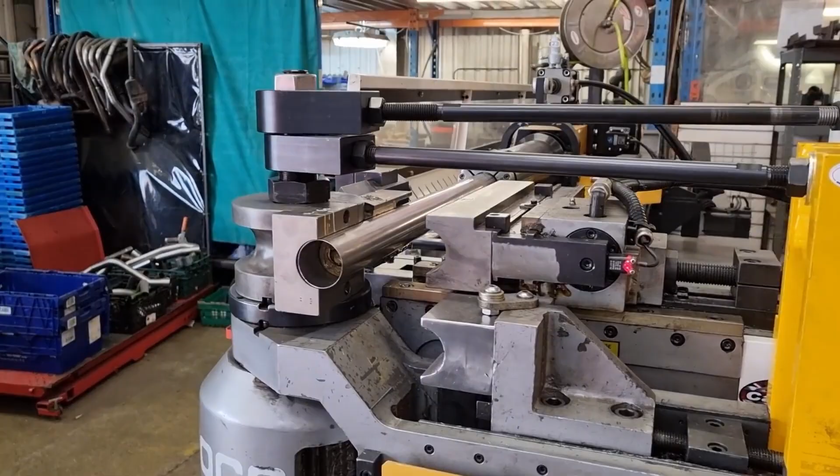There is a machine running in your kitchen right now. It has been running, essentially unchanged in its core design, for nearly 200 years. Not upgraded, not redesigned. The same fundamental principle, operating on the same trapped gas, driven by the same mechanical pump, just with better insulation and a digital thermostat bolted on top.

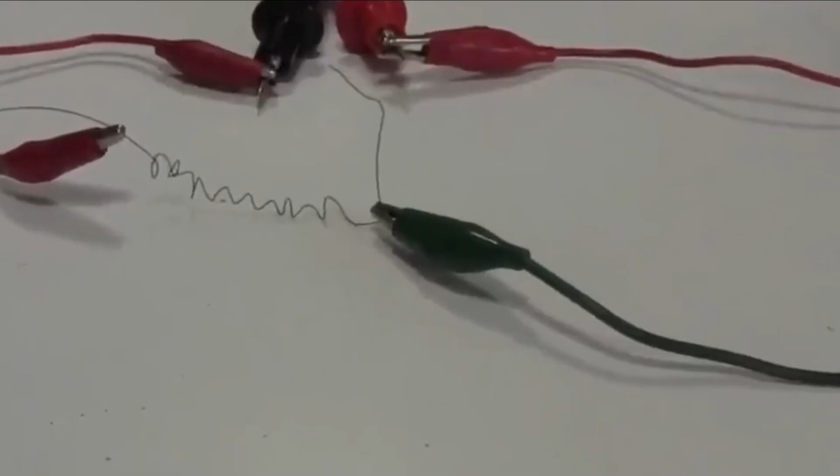The refrigerator is one of the most consequential inventions in human history. Remove it from American infrastructure for a single week, and the food supply chain collapses. Hospital pharmacies lose temperature-sensitive medications. Entire climate zones become functionally uninhabitable during summer. It is everywhere, it is invisible, and almost nobody thinks about how it works or how old the idea actually is.

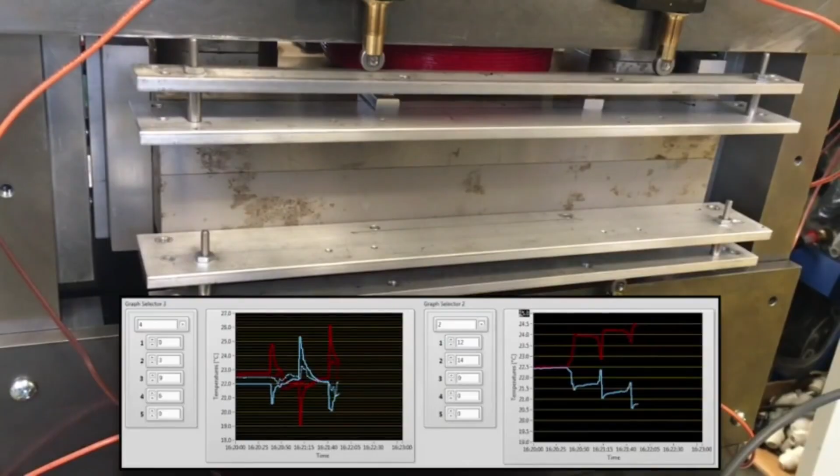Here is what makes this story unusual. The country that invented the refrigerator may also be the country that ends it. Not with a better version of the same machine, but with something so different that it has no moving gas, no chemical refrigerant, and makes almost no sound at all. And the key component is a piece of metal discovered accidentally by a Navy researcher trying to build a better missile nose cone, where the refrigerator actually comes from.

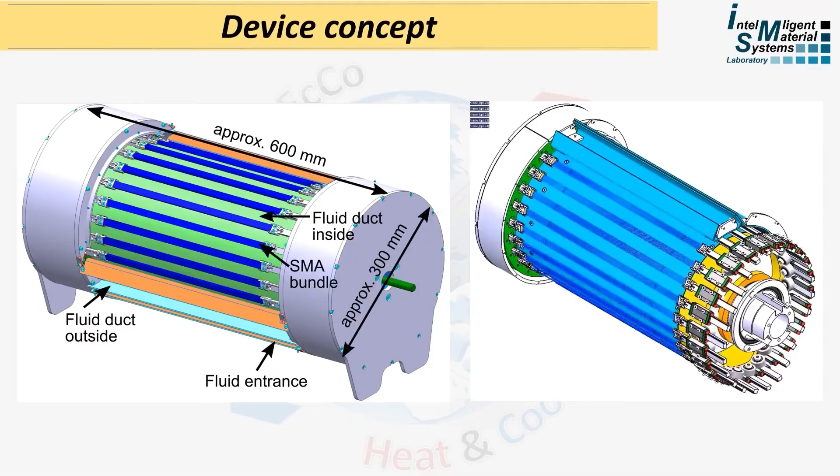Most people, if asked, would guess the refrigerator emerged from European industrial laboratories in the late 19th century. The actual origin is earlier and more American than that, in 1834. A man from Newburyport, Massachusetts, named Jacob Perkins patented the first working vapor compression cooling machine. Perkins demonstrated that a special gas, compressed mechanically and then allowed to expand, could extract heat from an enclosed space reliably, and on demand he could make ice.

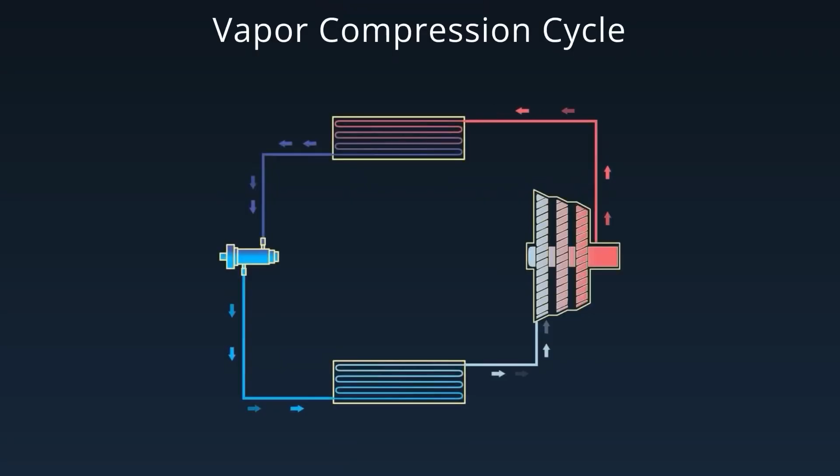He could keep things cold in an era before electricity, before modern chemistry, before industrial manufacturing. He built the core system that still hums behind you in your kitchen today. Nearly 2 centuries of engineering refinement have followed. Better materials, better refrigerants, better insulation, electronic controls, but the operating principle has not changed. Compress a gas, release heat, expand the gas, absorb heat, repeat indefinitely.

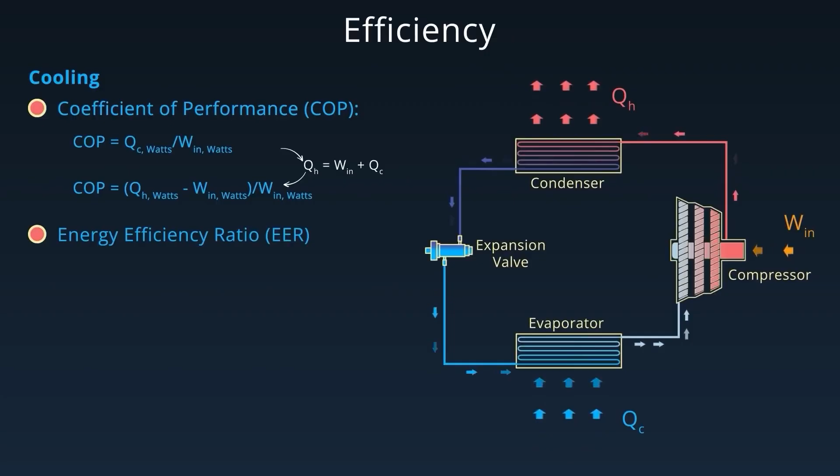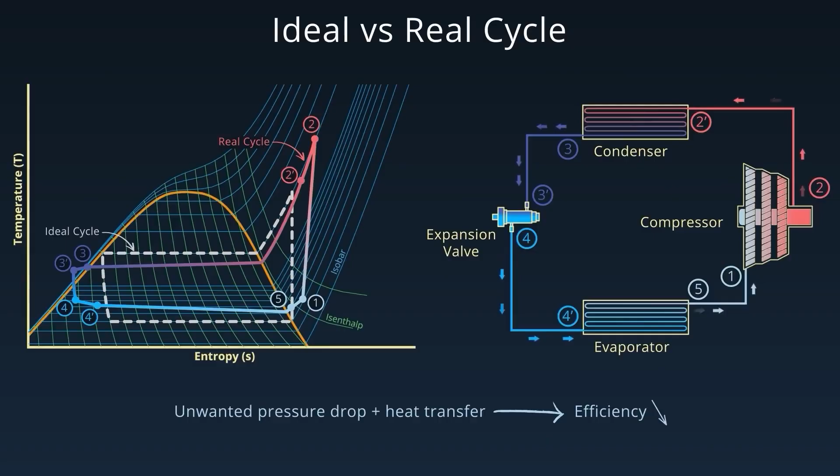That single loop, Perkins's loop, underpins every refrigerator, every air conditioner, every commercial freezer, every pharmaceutical cold storage unit currently operating in the developed world. The question worth asking is why nothing has replaced it. The answer is not that nobody tried. The answer is that every alternative approach encountered a specific engineering wall that nobody could get around for 50 years, until a research team in Maryland tried pushing in a completely different direction.

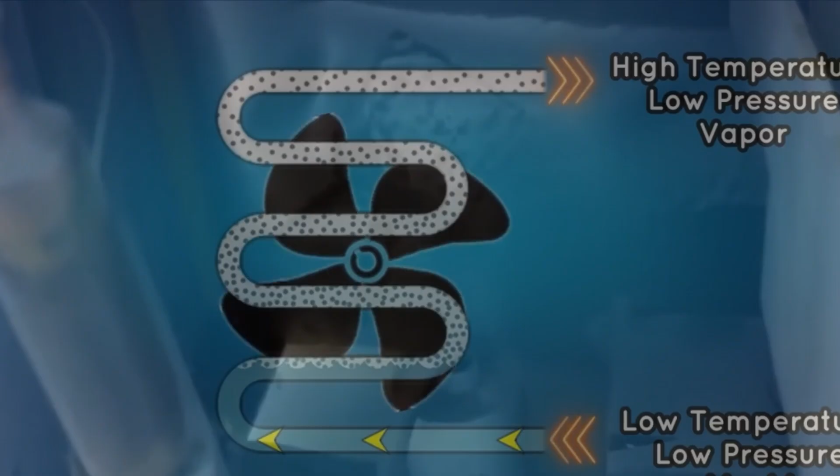The problem with the machine you already have: vapor compression refrigeration has 2 structural problems that have never been resolved, only managed. The first is mechanical. The compressor, the pump at the heart of every refrigerator, contains pistons that cycle continuously, thousands of times per hour, for the entire operational life of the appliance. That is the hum you hear from your kitchen at night.

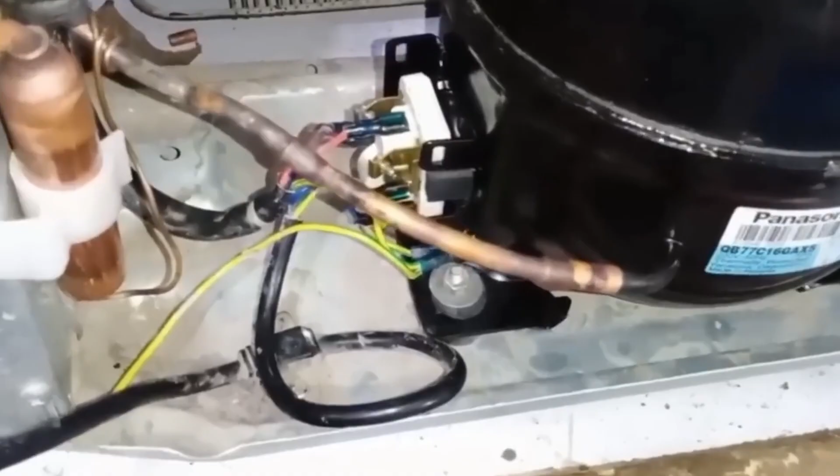That hum is also a countdown. Moving parts wear, bearings degrade, seals eventually fail. The compressor is the reason refrigerators die, and it is the reason they make noise.

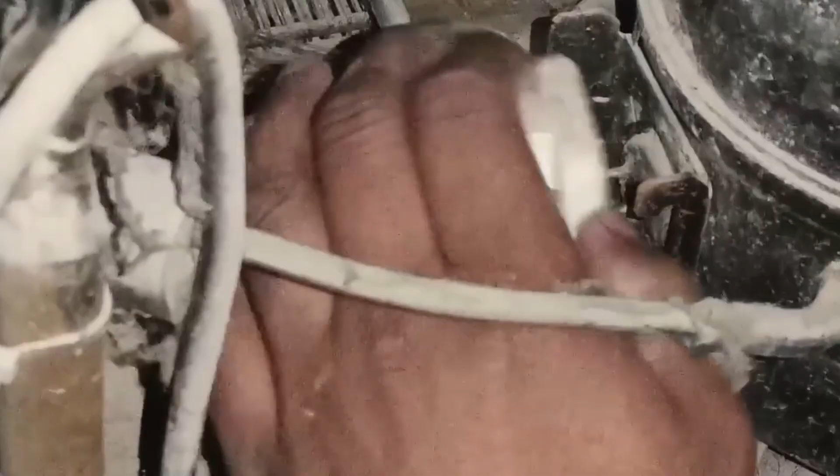The second problem is chemical, and it is significantly more serious at scale. The gases used as refrigerants are sealed inside the system, but sealed imperfectly. They seep at joints, they escape during maintenance, and they are released in large quantities when appliances are scrapped. Many of these gases carry global warming potentials that are difficult to communicate without the numbers feeling abstract.

R134A, one of the most widely used refrigerants of the past generation, has a warming impact approximately 1,400 times greater than an equivalent mass of carbon dioxide. Now multiply one refrigerant leak by every refrigerator, every car air conditioning system, every commercial freezer, and every rooftop cooling unit operating across the country.

The United States government has formally acknowledged this problem. The AIM Act, passed in 2020, committed the country to phasing down high-warming refrigerants by 85% over 15 years. The legislation exists, the timeline is in motion. The replacement chemistry, however, is not clean. Leading substitutes are either flammable, operate at higher pressures, or break down into compounds that regulators are already studying with concern. The country has legislated itself into a situation where the working fluid the entire cold chain depends on must be replaced, and no fully satisfactory replacement fluid currently exists.

Which is exactly what pushed American researchers toward a different question entirely. What if the answer is not a better gas? What if the answer is no gas at all?

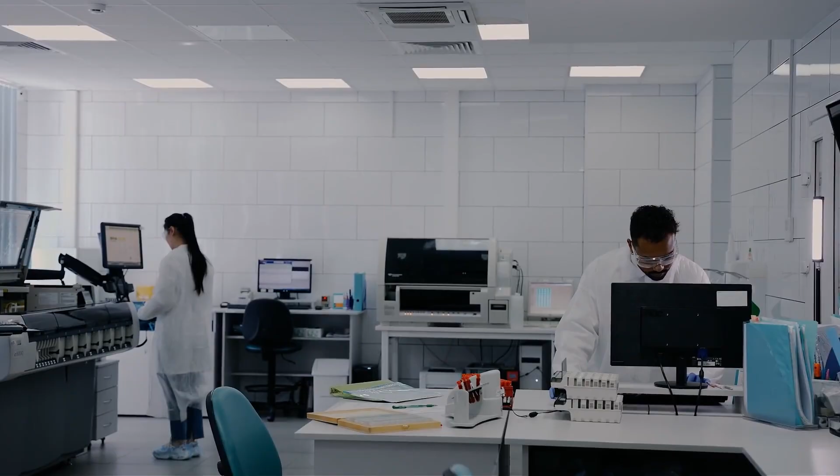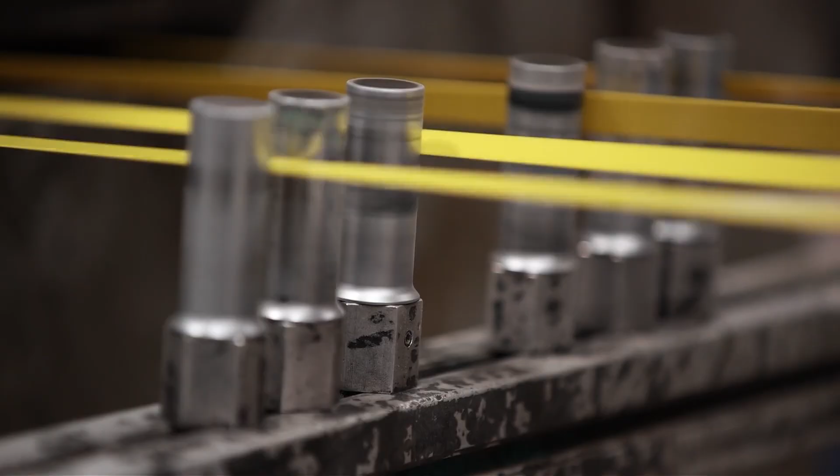The rubber band you already understand. Before the Maryland laboratory and before the Navy metallurgist, there is a physics demonstration you can do right now with materials in your home. Take a thick rubber band, stretch it quickly, and hold it against your upper lip immediately after. It will feel warm noticeably. Now let it relax completely and press it to your lip again. It will feel distinctly cool. You just ran a refrigeration cycle with your hands. What you felt is real physics.

When you deform certain materials rapidly, you force their internal molecular structure into a more ordered arrangement. The transition to order releases heat. When the material is allowed to return to its relaxed state, the structure becomes disordered again, and that disorder absorbs heat, pulling it from whatever the material is in contact with.

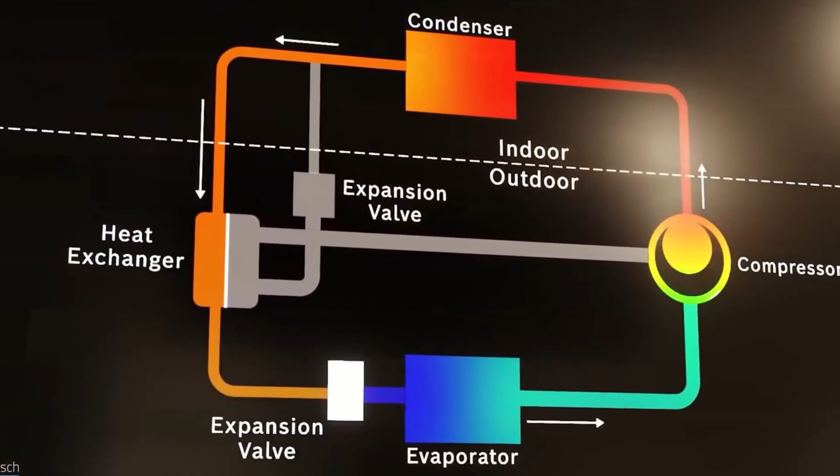An English scientist named John Gough described this effect in 1805. James Joule quantified it decades later. It is called the Elastocaloric effect.

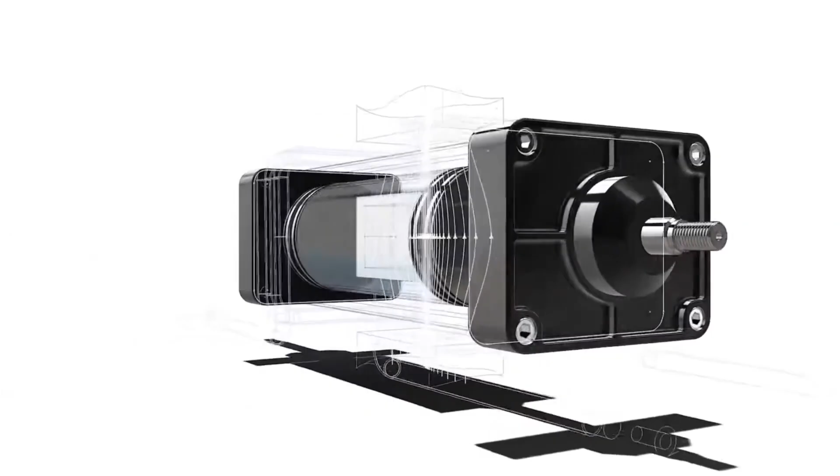The principle is not complicated. The problem was always practical. A rubber band degrades within weeks of continuous cycling. It cannot move meaningful quantities of heat, and no material existed that could survive the millions of deformation cycles that a real appliance demands, until a Navy researcher accidentally created one while working on something entirely unrelated.

Here is a question to carry into the next section. If this effect has been understood since 1805, why did it take until the 21st century to build a working machine around it? The answer involves a direction of force that nobody tried for 50 years, the metal with memory.

In 1959, a metallurgist named William Buehler was working at the Naval Ordnance Laboratory in White Oak, Maryland, on a project with no connection to refrigeration. He was attempting to develop a better nose cone material for a Navy missile, mixing nickel and titanium alloys in search of useful mechanical properties.

What he produced had properties that were genuinely unprecedented. The alloy could be bent significantly out of shape and would snap back elastically. More remarkably, it could be deformed at one temperature, cooled, and would then return to its original shape when reheated, as if the metal retained a memory of the geometry it wanted to occupy.

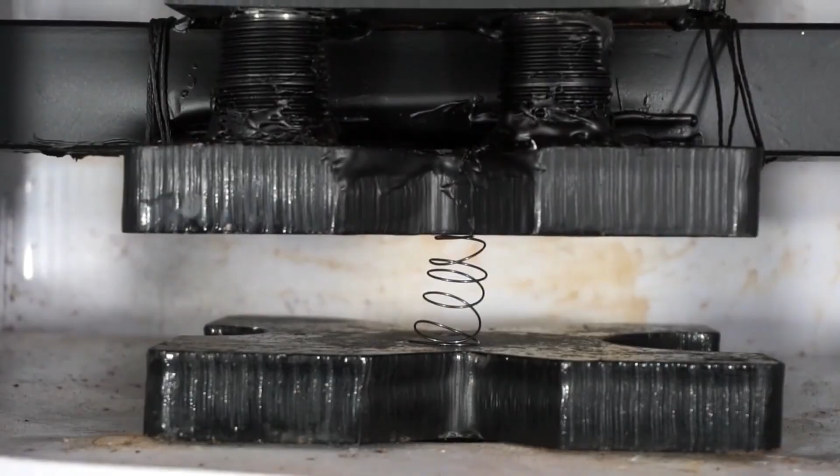The material was named Nitinol, from Nickel Titanium Naval Ordnance Laboratory. It is an American invention, funded by American military research, and it is now found inside cardiac stents in millions of patients, in eyeglass frames, and in aerospace actuators worldwide.

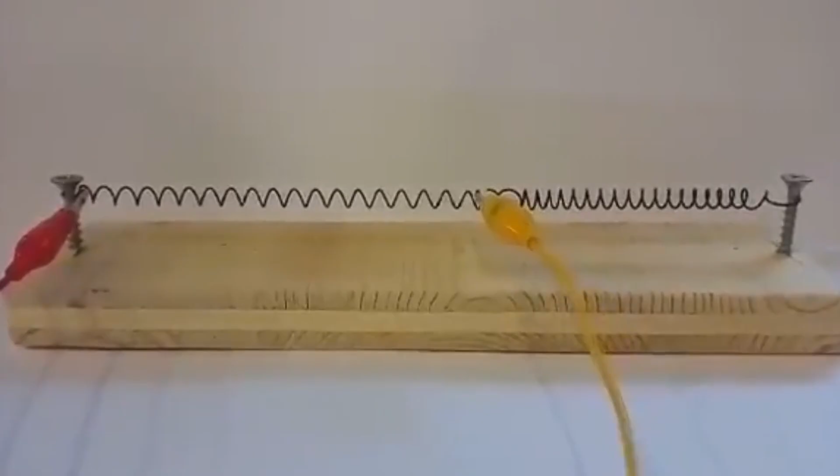But nitinol's most extraordinary property for cooling applications is its phase change behavior. When compressed, its crystal structure transitions into a tighter, more ordered phase, and it releases heat, not by a fraction of a degree, but by tens of degrees. When released, it drops equally sharply and draws heat aggressively from its surroundings, a rubber band with aerospace-grade material properties. A solid-state refrigerant you can hold in your hand.

The United States Department of Energy conducted a formal assessment of alternatives to vapor compression cooling and ranked elastocaloric technology, the application of nitinol type materials to refrigeration, at the top of the list of non-vapor compression technologies with genuine replacement potential. Not one of several promising candidates. First.

So why was there no nitinol refrigerator in 2010? In 2015? The answer is a specific engineering failure that destroyed every prototype built for 5 decades, the wall that stopped every prototype. The obvious approach to building an elastocaloric cooling system is to stretch the nitinol to put it under tension, pull it, let it go, and harvest the cold.

This works. It works well. And then it stops working because the material fails. Here is why. When you pull any metal under tension, every microscopic flaw in the material, invisible voids, grain boundaries, surface irregularities, becomes a stress concentration point. Each pull opens those flaws slightly. Each release allows them to close, but each successive cycle opens them marginally more than before. This is metal fatigue, and it is the same mechanism that allows you to snap a paperclip by bending it back and forth, even though you could never break it in a single pull.

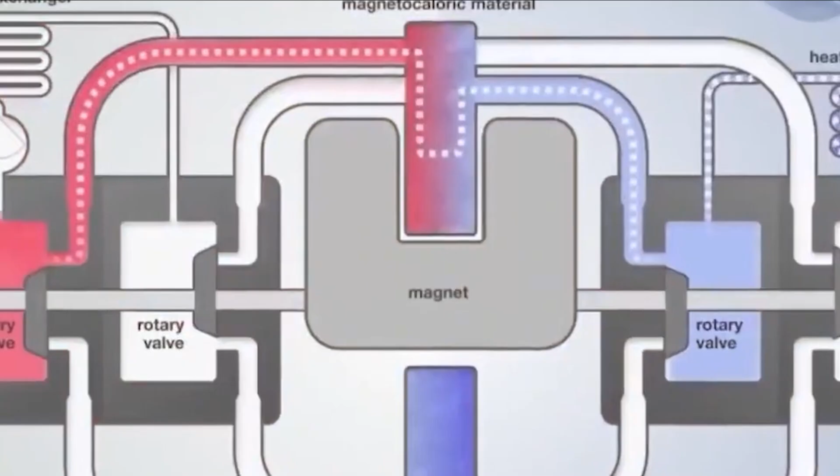A kitchen refrigerator runs its cooling system continuously for 10 to 15 years. That is not thousands of cycles. That is tens of millions. Early elastocaloric prototypes were failing within weeks of continuous operation. Researchers would assemble a functioning device, begin testing, and watch the active component develop hairline fractures and shear apart.

A second problem compounded the first. Nitinol requires substantial mechanical force to trigger its phase change. Generating that force requires significant energy input. Early prototypes were spending large amounts of energy to strain the material and recovering only a fraction of it as usable cooling. The efficiency numbers were not competitive with a compressor that had been optimized by global industry for a century and a half.

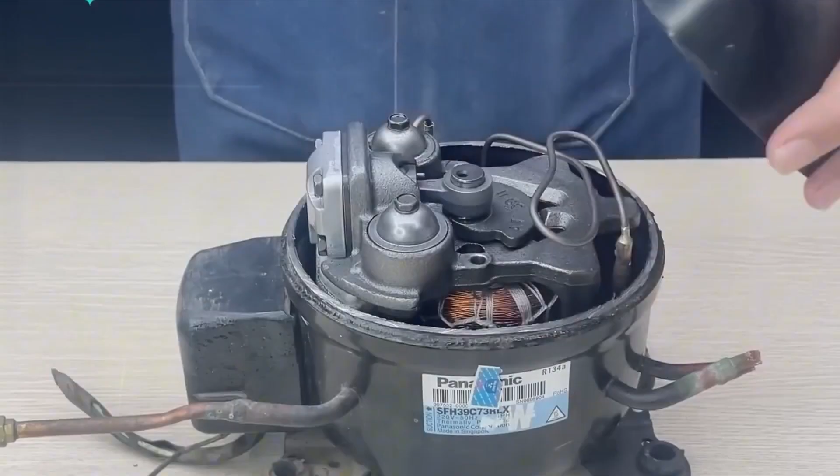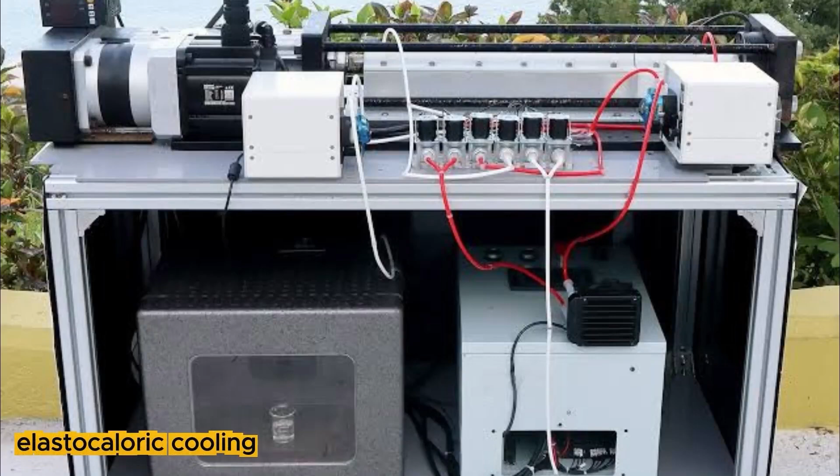By the 2010s, elastocaloric cooling had a consistent reputation in the engineering community: beautiful underlying physics, broken practical execution, a technology that could demonstrate impressive cooling performance right up until the moment it destroyed itself. The Maryland team studying this problem understood the fatigue failure better than anyone else, largely because they had broken more nitinol than anyone else.

And at some point in that work, they asked a question that sounds almost too simple: what if we stop pulling it, the direction nobody tried? The insight from the University of Maryland team.

Working in collaboration with the Department of Energy's National Laboratory System under materials scientist Ichiro Takeuchi, this was fundamentally about mechanics. Cracks propagate under tension. Tension opens flaws, but compression does the opposite, it closes them. Squeeze a piece of metal rather than stretching it.

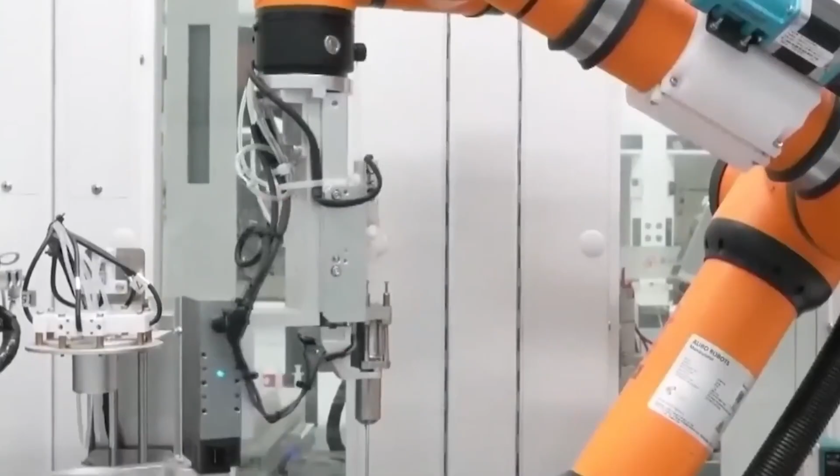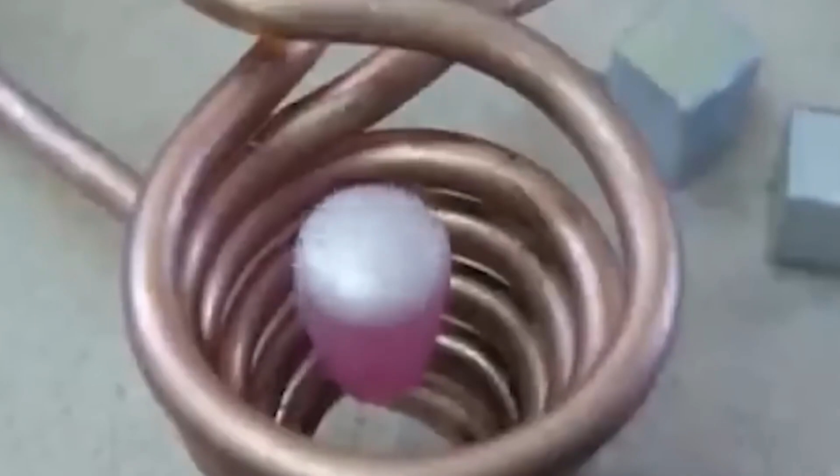The microscopic voids that would normally grow into fractures are being clamped shut on every cycle rather than forced open. The team built their system around Nitinol tubes driven in compression, squeezed along their length by hydraulic force rather than pulled apart. The same phase change, the same heat release and absorption, but operating under conditions where the failure mechanism of tension-driven fatigue is replaced by the stabilizing effect of compressive stress.

The results, published in the journal Science, demonstrated materials performance far beyond what elastocaloric devices had previously achieved, and into a range where the technology becomes a genuine competitor to vapor compression rather than a laboratory curiosity.

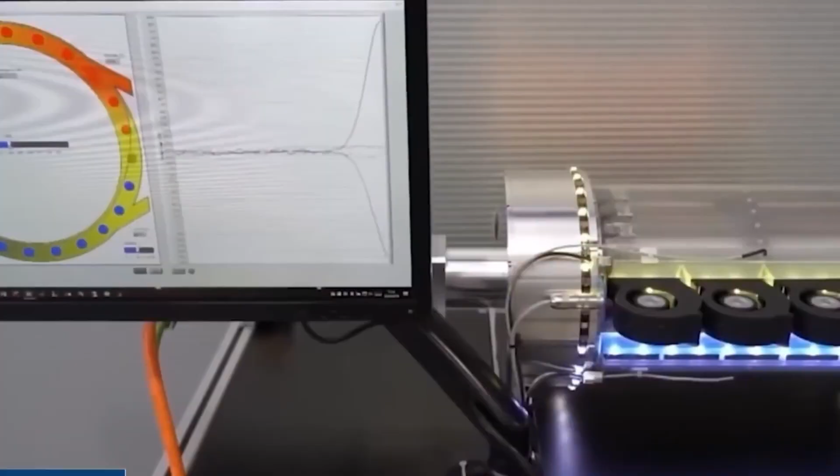The physical architecture that emerged from this work is worth understanding. A bundle of thin nitinol tubes is compressed hydraulically. As they compress, they heat, and a loop of water, plain water, with no chemical refrigerant properties and no environmental hazard, carries that heat away to external coils. When the driver releases, the tubes return toward their remembered shape, drop sharply in temperature, and the water loop returns to collect the cold and deliver it to the refrigerated space.

Notice what that description does not contain. No refrigerant gas. No global warming potential of any kind. No chemical that regulators are working to phase out. The only fluid in the system is water. The only refrigerant is a solid piece of metal that never leaves the machine. If the entire system were to rupture in your kitchen, the consequence would be a water puddle.

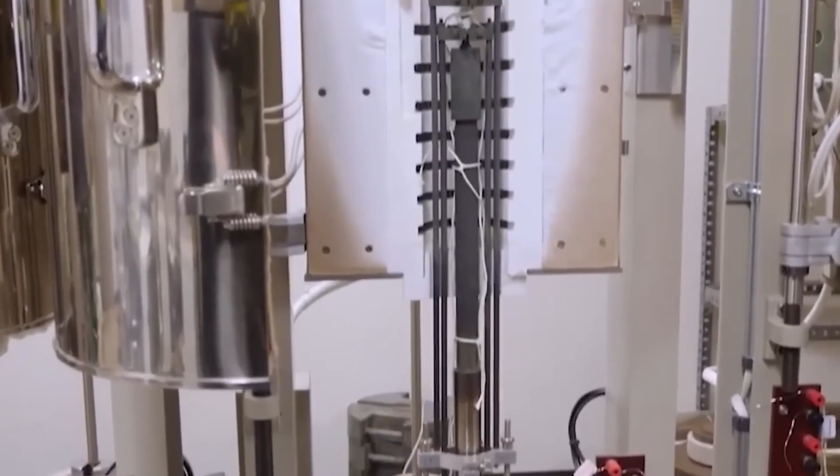Notice also that a compressor must run continuously, because stopping it allows the gas pressure to equalize and the cold to disappear. An elastocaloric core operates in discrete compression strokes that can be matched to actual thermal demand. It does not need to run constantly, and a system without continuous mechanical operation is, by definition, substantially quieter than anything currently in your kitchen.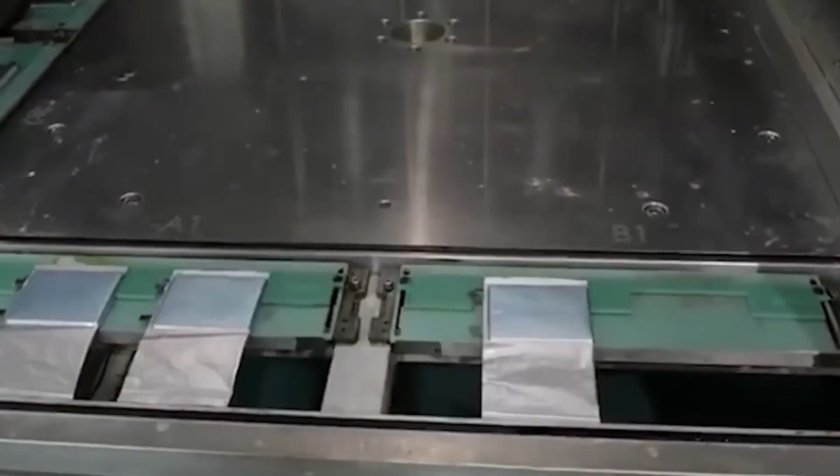Where this actually stands, the honest version of this story requires clarity about the gap between laboratory results and consumer products. There is no announced date on which you walk into an appliance store and purchase an elastocaloric refrigerator. What exists are prototypes and pre-commercial systems, impressive ones, that demonstrate the physics works at useful scale, but not products with manufacturing cost structures and warranty data that an appliance company could take to market.

Three specific obstacles remain. Nitinol is not an inexpensive material. The alloy must be produced under vacuum because titanium reacts with atmospheric oxygen, and the nickel-to-titanium ratio must be controlled with exceptional precision. A fraction of a percent of deviation shifts the temperature at which the phase change occurs. These requirements mean specialty manufacturing rather than commodity production, and specialty manufacturing means costs that are currently not competitive with a compressor produced at global industrial scale.

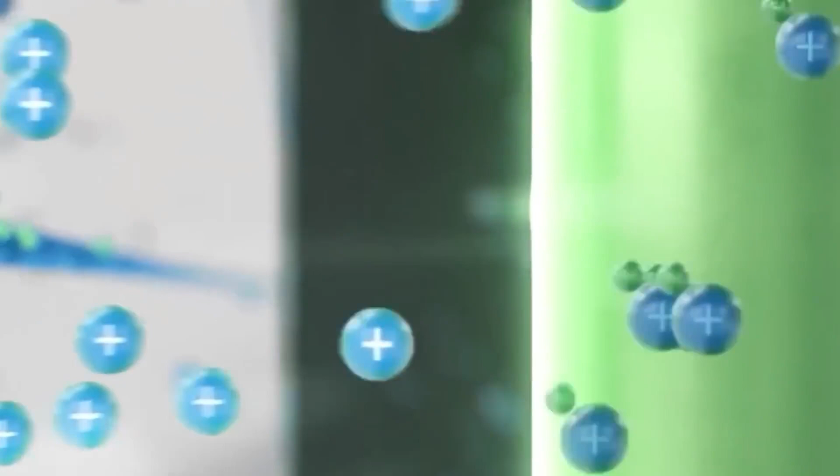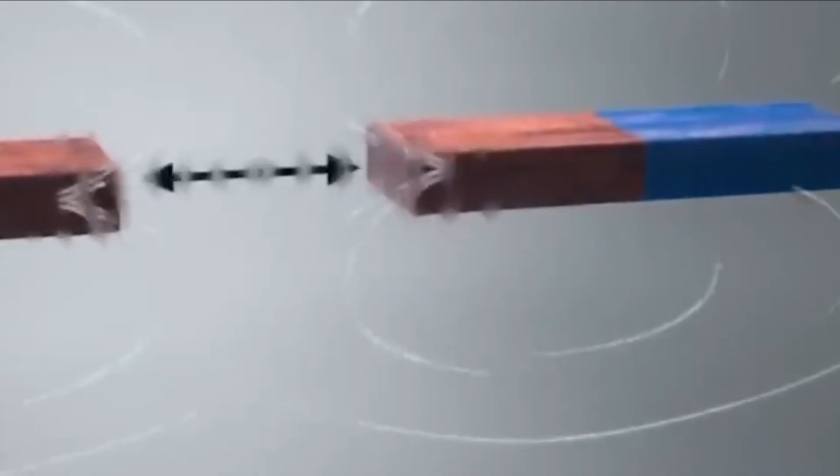Replacing the compressor with compression does not eliminate the need for force. Something must drive the hydraulic system, and that driver now inherits the durability requirement that the nitinol component just shed. The mechanical driver becomes the component that needs to survive tens of millions of cycles, and appliance manufacturers require hard data on full service life survival before committing to production. Generating that data takes time that cannot be artificially compressed, because accelerating a fatigue test changes the conditions being measured.

None of these obstacles are physics problems. They are engineering and manufacturing problems. They are the same category of obstacles that faced every technology currently operating at scale: computing, solar generation, lithium batteries at an equivalent stage in their development trajectories. The pattern is consistent. A thing works in a laboratory and appears economically impossible, and then manufacturing scale and materials science do what they have always done.

Here is the symmetry worth holding. A man from Massachusetts invented the machine that made refrigeration a utility available to ordinary people. A Navy laboratory in Maryland accidentally produced the metal that makes a replacement physically conceivable. And a university team working a few miles from that same laboratory found the one direction of force that nobody had seriously tried for 50 years.

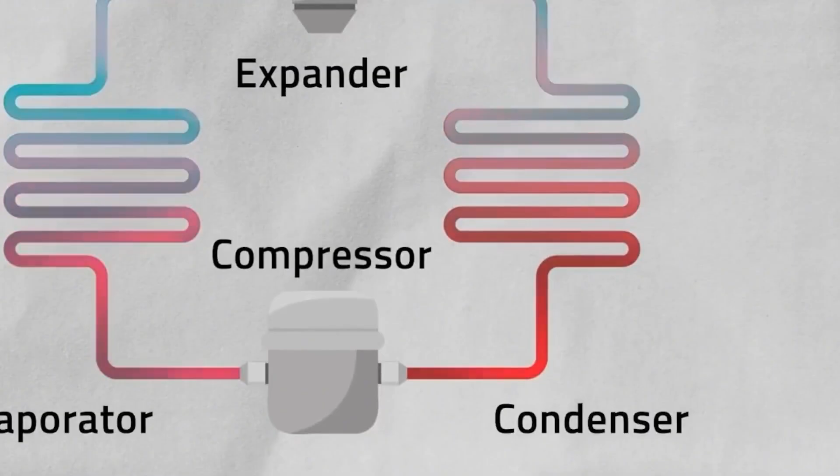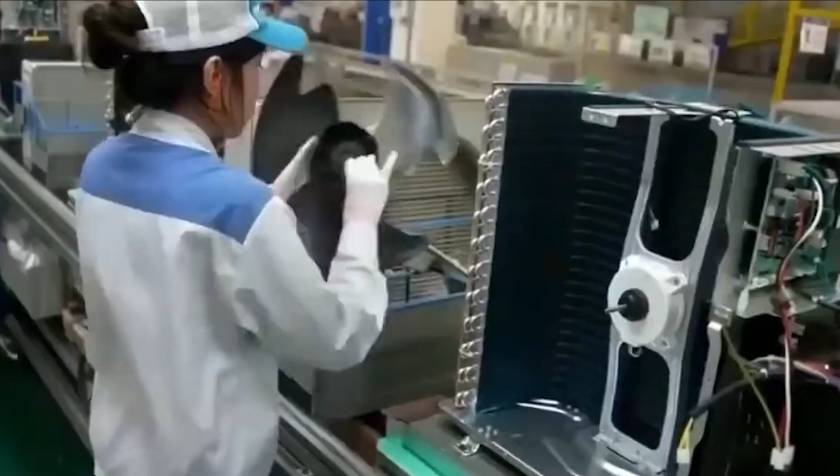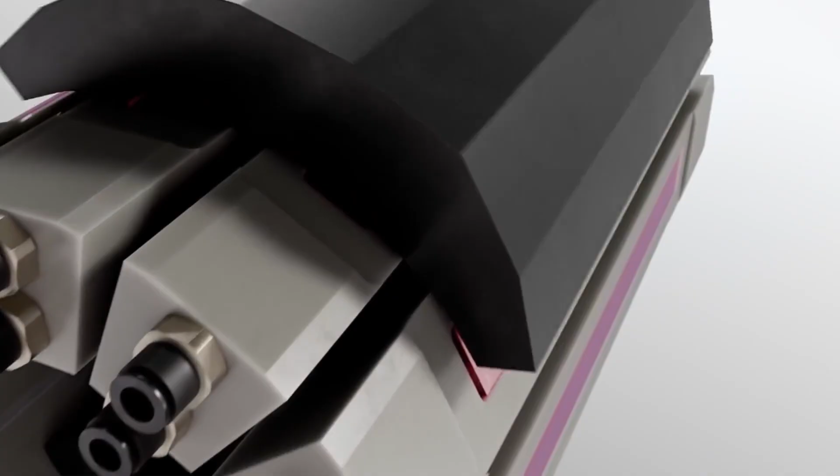The compressor in your refrigerator is not only in your kitchen. It is in your car, in the ceiling above your office, in the data centers running the applications on your phone, in the systems keeping battery packs in electric vehicles within their safe temperature range. Each of those applications has reasons to want what an elastocaloric system offers: no refrigerant gas, lower noise, solid-state operation, recyclable metal.